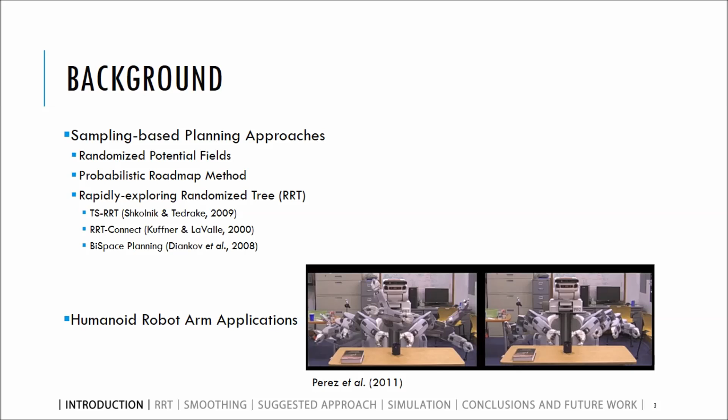Otherwise, you draw a line from initial configuration through the random configuration with an epsilon length. The tree grows like that, and when it reaches the goal configuration, it stops. You will have the connectivity path. It is continuous, but it is jerky. So you will need some smoothing.

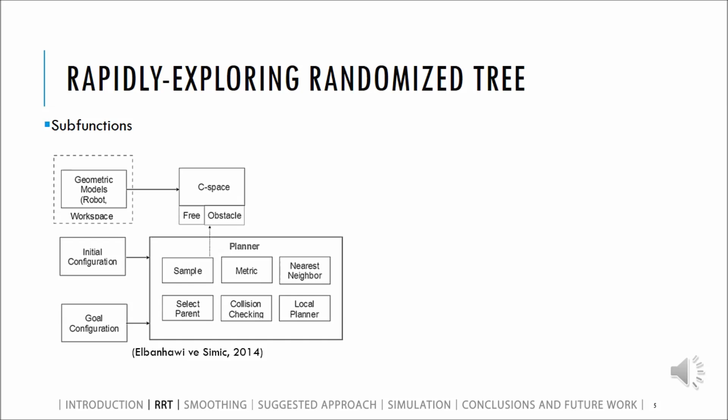For local planning, there are many options. For example, you can use B-splines or cubic splines. But while you are using B-splines, you should define control points, which are based on heuristics. On the other hand, cubic splines don't require that. So we prefer cubic splines as suggested by Lin and his friends.

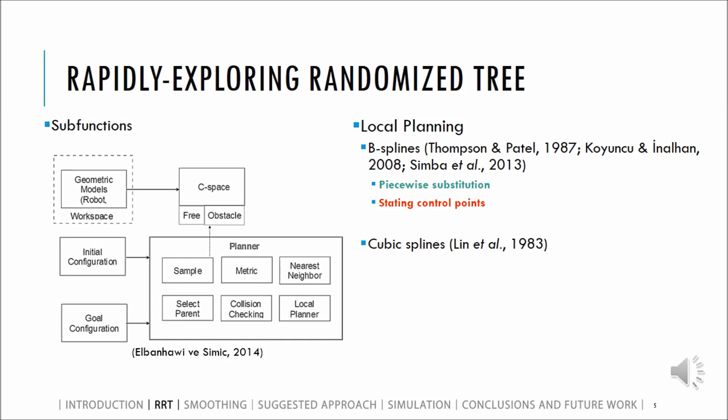If your acceleration function is linear, the velocity function will be quadratic and your position function will be cubic. So they are all continuous functions.

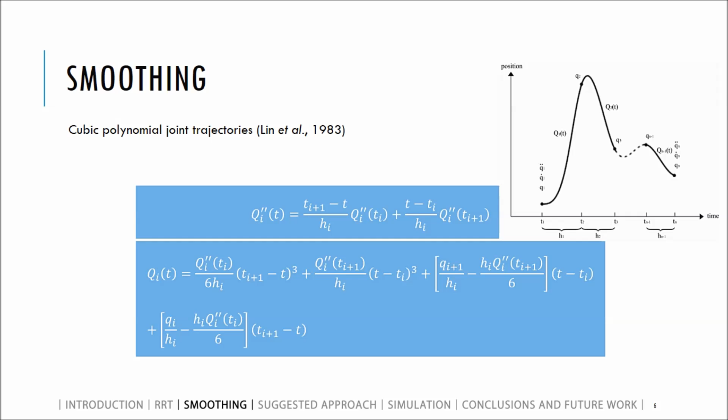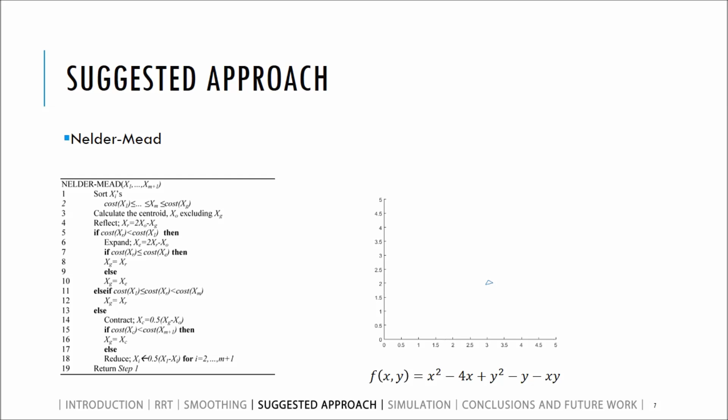Here, there is a pseudocode of Nelder-Mead algorithm. For a cost function with n variables, you should define n plus 1 possible solutions. Then you will replace those solutions with better solutions until you obtain the optimal solution. It is a search algorithm. In our case, the cost function is the total time. In other words, the summation of time intervals, h's.

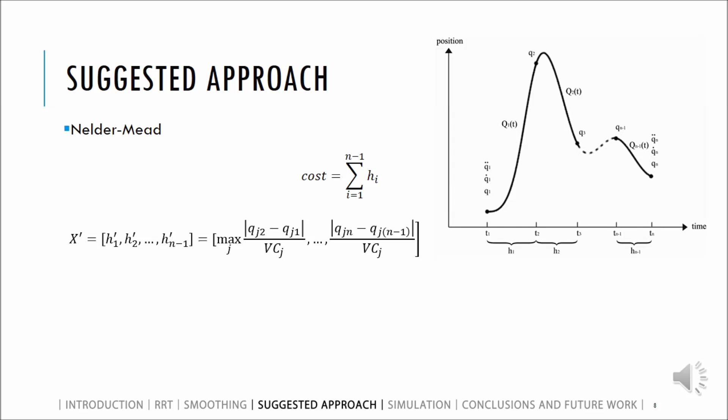If you have n minus 1 time intervals, you will need n possible solutions. There is a methodology for these possible solutions. We define X i primes. If they are not feasible, we convert them to their feasible versions.

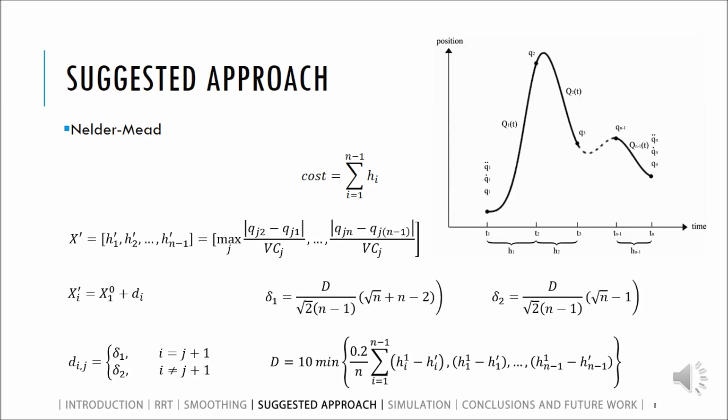For the approach, we suggested the initial configuration and the desired position in the task space are known. In each step, we transfer the tree from the configuration space to the task space, so we need forward kinematics, but not inverse kinematics. We also know the velocity, acceleration, and jerk constraints, and positions and sizes of the obstacles. This can be known by a camera or another learning tool.

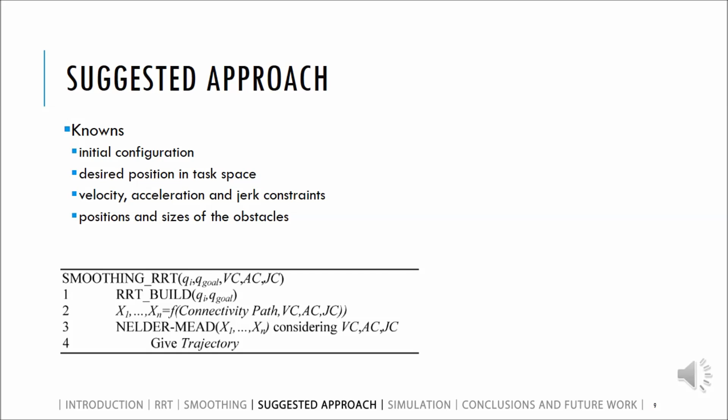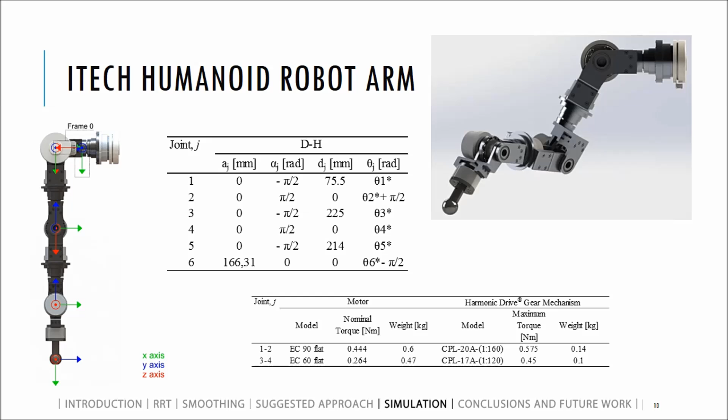Here is our case study. I take a humanoid robot arm. You can see the DH parameters. There are 6 revolute joints of this arm. We use Maxon motors and harmonic drives in each joint. For this scenario, we define 4 spherical obstacles. Here is the initial configuration and the desired pose.

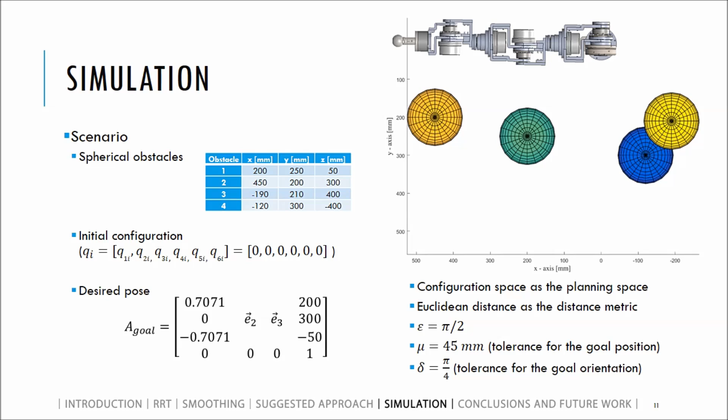We use configuration space as the planning space, Euclidean distance as the distance metric. You can see the tolerances for the goal position and the goal orientation. The connectivity path we have obtained is given in the table. It is a solution, but it is not the only solution. It is one of infinite amount of solutions. So it is not the ideal solution.

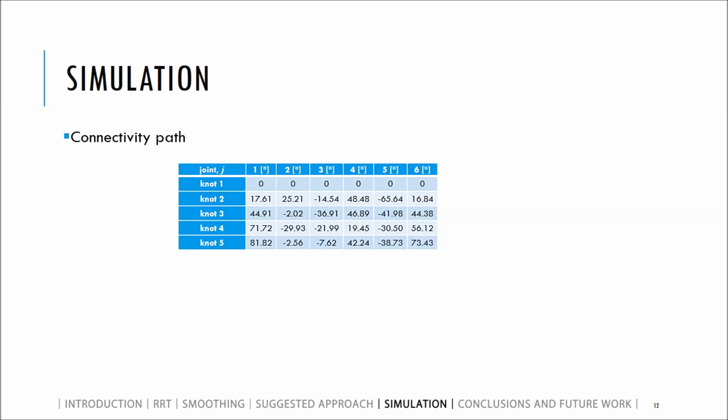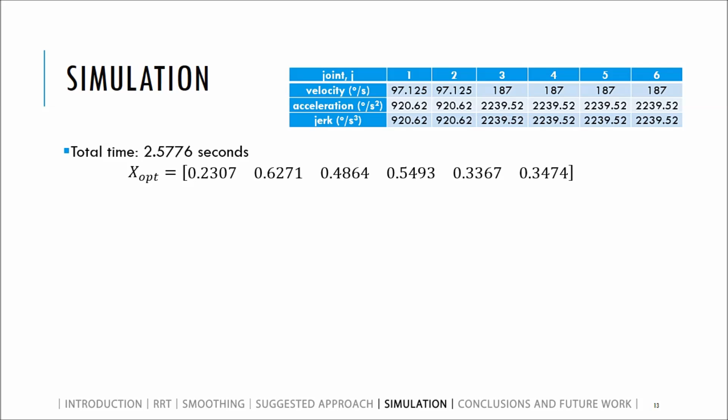Here are the kinematic constraints for smoothing, and after curve fitting and optimization, we obtain the total time as 2.6 seconds. Here is the vector of time intervals, and here are the characteristics of position, velocity, and the acceleration. They are all continuous.

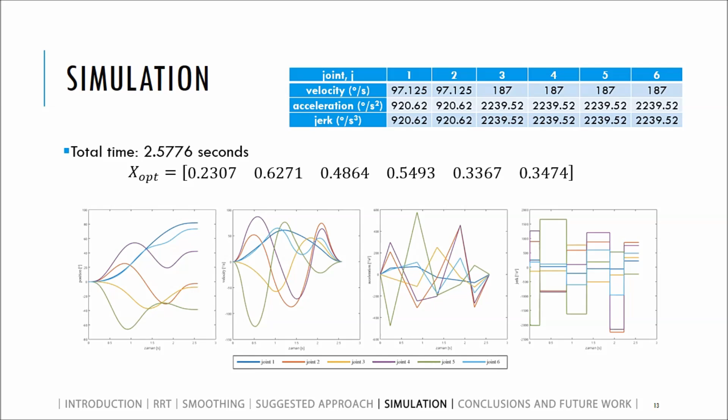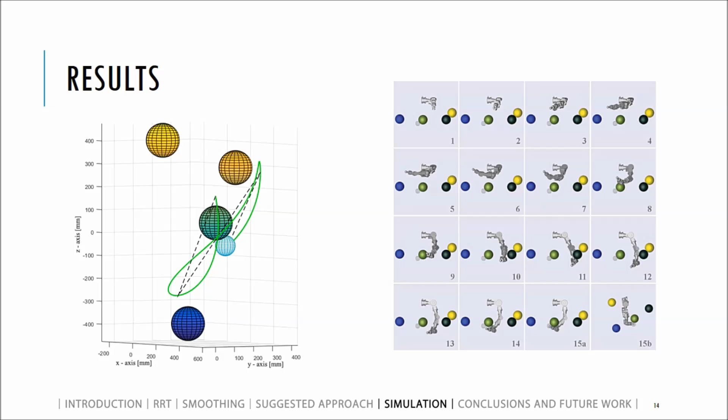You can see the motion, the connectivity path, and the curve we fitted. Here, the blue area is the goal area with a tolerance, and there are 15 frames from the motion.

In this paper, we combined 2 methods and planned the trajectory without using inverse kinematics. We explicitly explained the smoothing process of the RRT-given path, which is not always done in RRT papers. We also considered jerk constraints, which is not common.

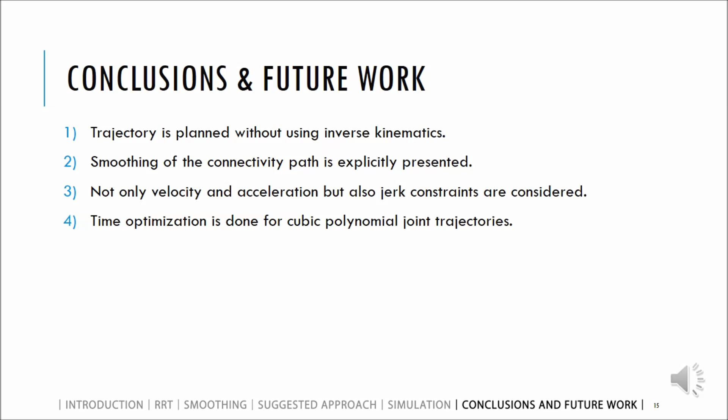Time optimization is done for cubic polynomial joint trajectories based on RRT-given path. For the future work, we plan to adapt our approach to other sampling-based methods and other versions of RRT, such as RRT star and dynamic RRT. Line of sight algorithms may be called to shorten the connectivity path. Finally, we plan to test our results on the real system, which is in the assembly phase.